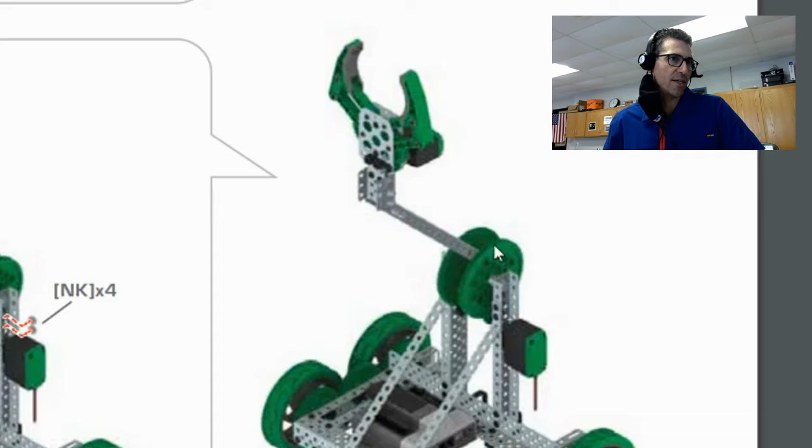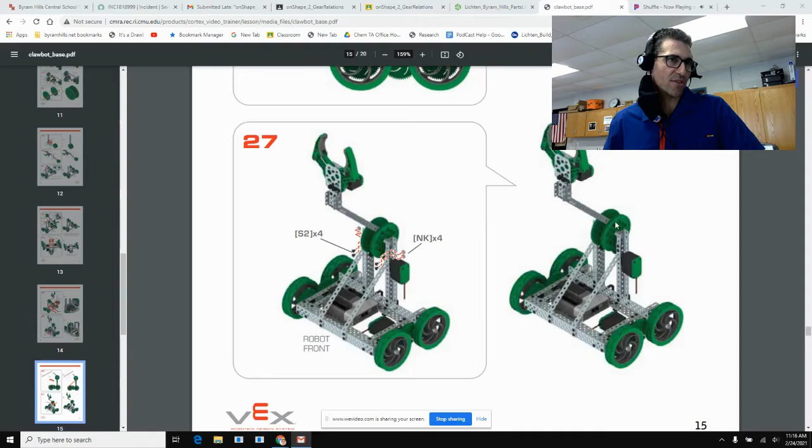This is the image from an instruction booklet of where we're trying to go next. As you can see, there's an arm with a claw on the end of it, and that's attached to a gear. And underneath this big gear, there's a smaller gear that's on a shaft that goes to the motor.

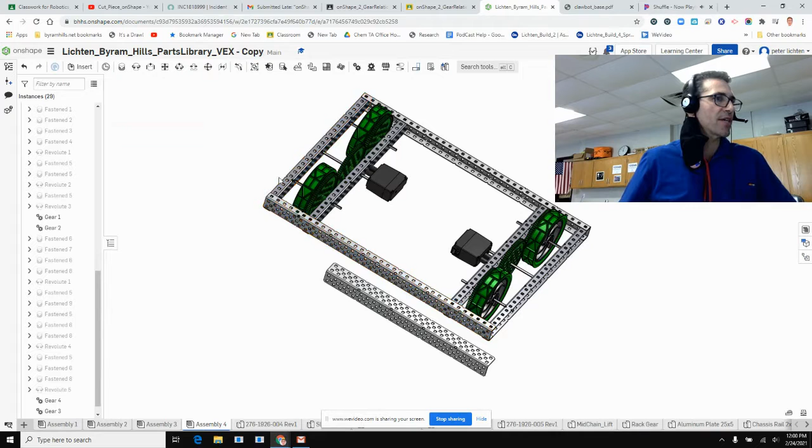Okay, I hit insert and then type metal, and I'm going to go into the metal folder here, and scroll down. I'm looking for what's called an angle brace—it's actually not called that in here, they just use an L to describe it—but this 2 by 2 by 25, either steel or aluminum is fine. I'll take the aluminum one and say green check. This piece is what I'm going to attach a pair of posts to, and the posts will then be used to build the rest of the armature.

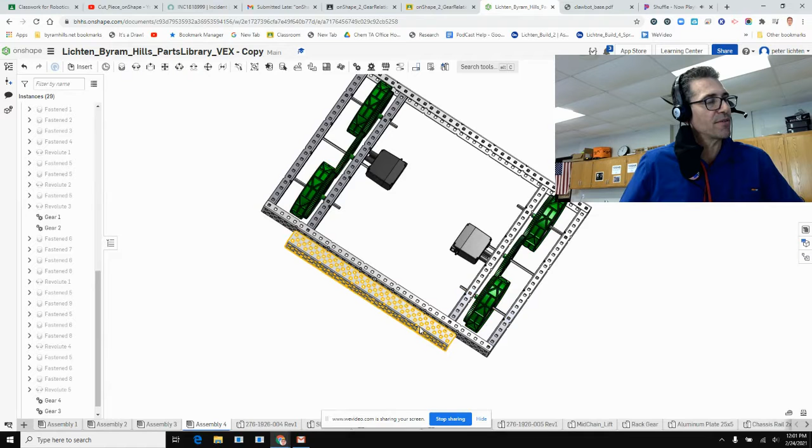So the problem with this piece is it's 25 holes long, and it's a little too big. When I put it in place, it's going to be banging into the gears. So what I'm going to do is offset—it's kind of annoying—I'm going to offset my gears and wheels to be closer to the edges, and that's going to give me enough room to put this in place. I'll be right back.

Now I'll have enough room behind me here to put the posts, and I'm going to say green check on that. I also noticed that my wheels and gears are not going to be hitting that.

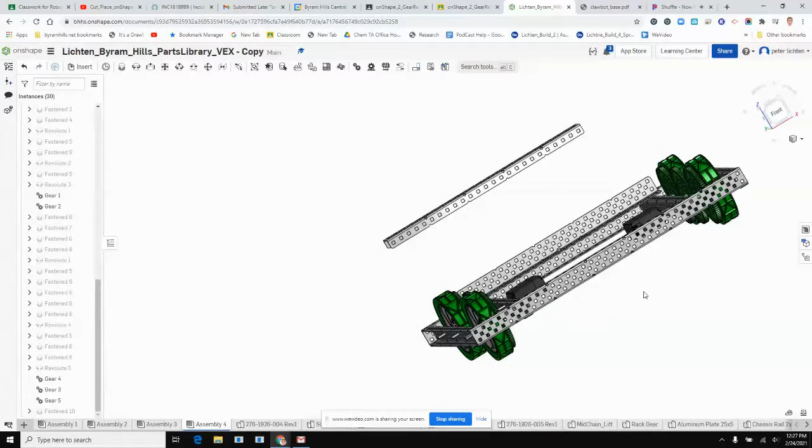Okay, so I've got a 1 by 2 by 25. I'm going to delete this—I don't think I'm going to use that. I'm going to come in on the side of it and hit a fasten mate at around the 5th hole, and then position that somewhere back here. Maybe it's right about there. Let's see how that came out.

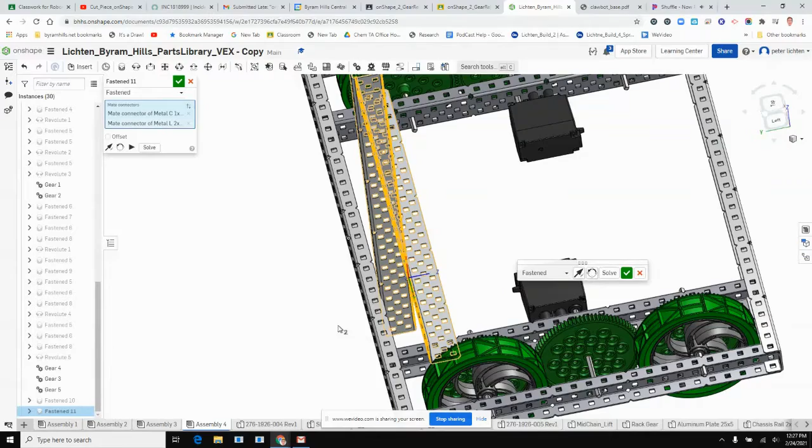Lots of problems, but let's see—we can reorient it again and again. And that's the way I want it to stick up. That's good, so it's sticking up. Is it hitting the bottom? I think I have some clearance between the bottom of the wheel and that. Yes, I do.

I like this because I can attach it on both ends. I can run a screw through the back into it, and I could also run screws from this angle brace into it to help give it some stability. I like where that is. I'm going to say green check.

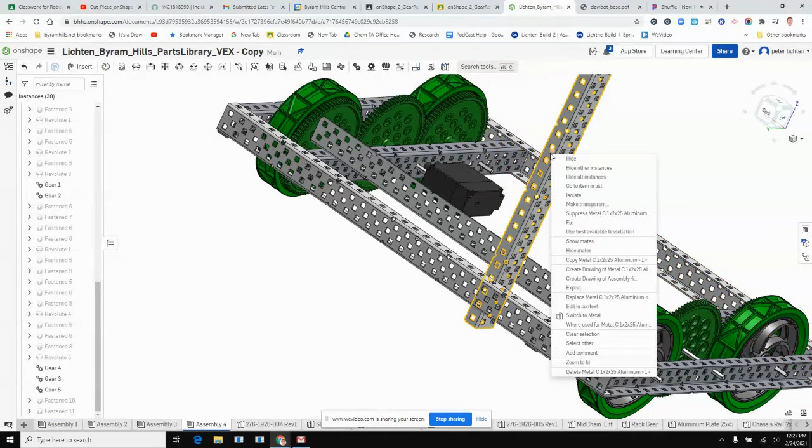Now I'm going to make a copy of this one and paste it next to me here. We're going to do the same thing—fasten mate about the 5th hole up. And then here's where I don't want it to be too far apart, but I'm just trying to guesstimate. Something like this probably will get me done.

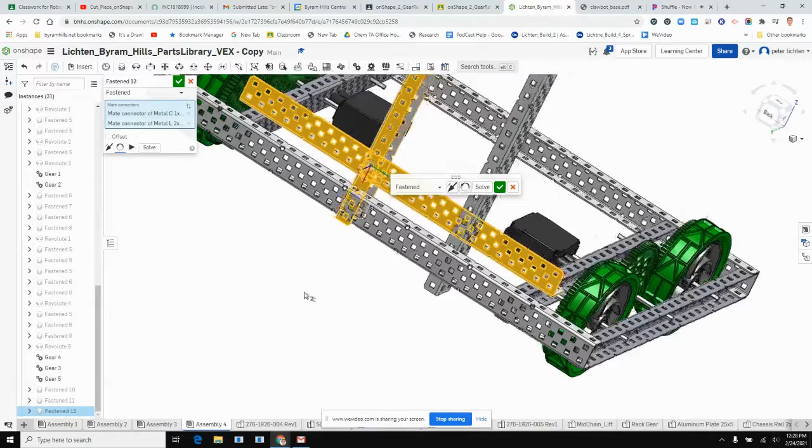And I'm going to have to rotate that twice. It also looks like I'm going to have to flip the primary axis on that one. Everything looks lined up, and I'm happy with it.

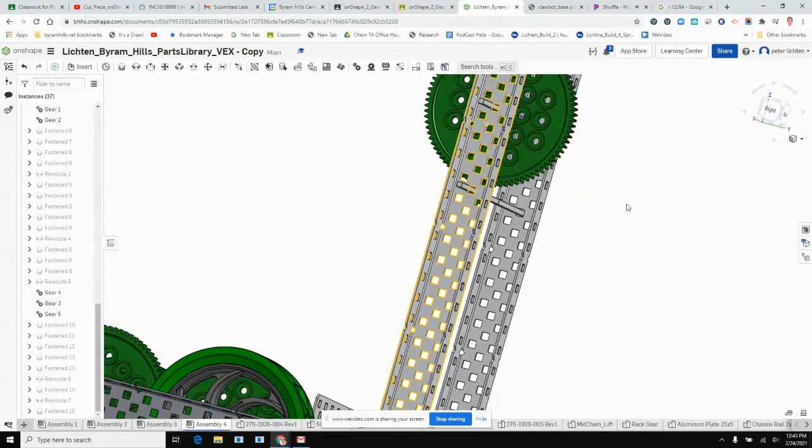Green check. So I took a 3-inch axle, that's this, and I copied it, then fastened it to itself to make a 6-inch axle. And I've placed them 1, 2, 3 basically holes apart, and I have an 84 tooth gear on the top axle and a 12 tooth gear on the bottom.

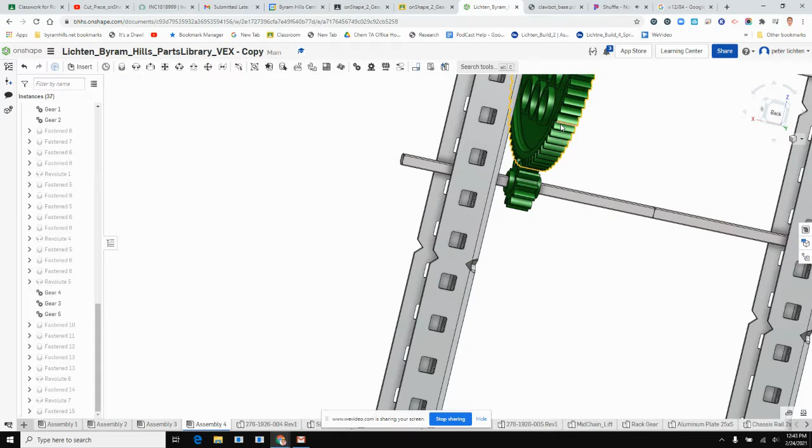And 12 divided by 84 is 0.14, call it 3. So for every one complete rotation of this gear, for every one complete spin, this one will only spin 1/7 of that—of its spin, I should say. So basically like 14% of a spin. Obviously this one's going to be spinning much slower than this one's going to be spinning.

This is how we increase our torque, or our rotational force. And we need more rotational force when we're picking up something like an arm that's going to have something at the end of it, like a ball or something like that. We're going to need that extra torque force to lift it up.

When you put those 6-inch axle shafts in place, you're doing that with revolute mates because they need to be able to spin. The next thing I'm going to do is put a gear relation in between the two mates I just did. The mates were Revolute 7, which is the one on the bottom, and Revolute 6, which is the one above it. My relation ratio is going to be 12 teeth by 84 teeth. And I hit the green check.

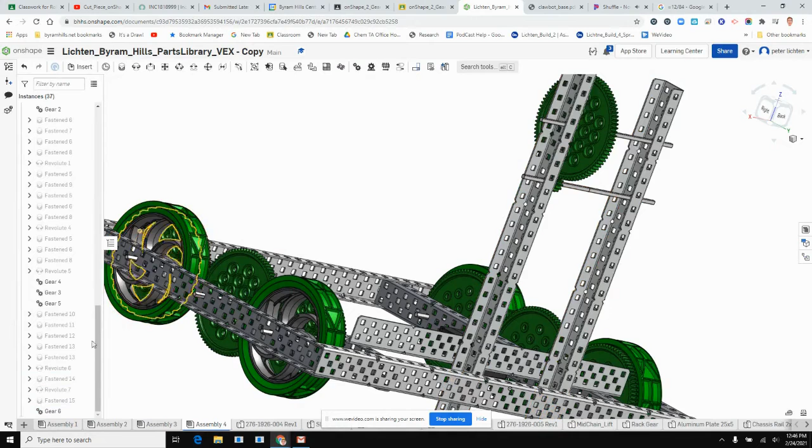Now if we test it by animating, say, Revolute 7, let's test and see if we're working. That's better. So we just always have to remember that anytime you have two gears interacting, one should always be spinning clockwise and one should always be spinning counterclockwise. All right, that's looking much better.

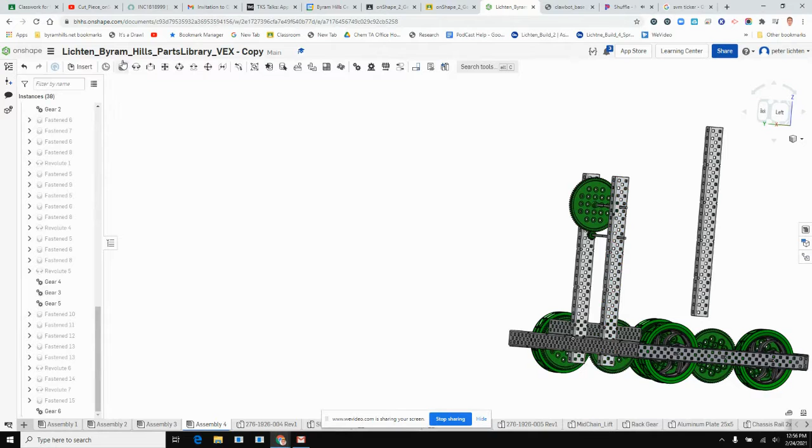Okay, we're ready to put the arm in place so we further know where to put things. I made a copy of one of these C channels, and now I'm going to fasten the C channel here to the shaft. In reality, it would be really fastened to the gear, but just to make sure I get it in the right place, I'm going to do that. And I think I want to flip it like so. Actually, I like it better the other way, flip it back like this.

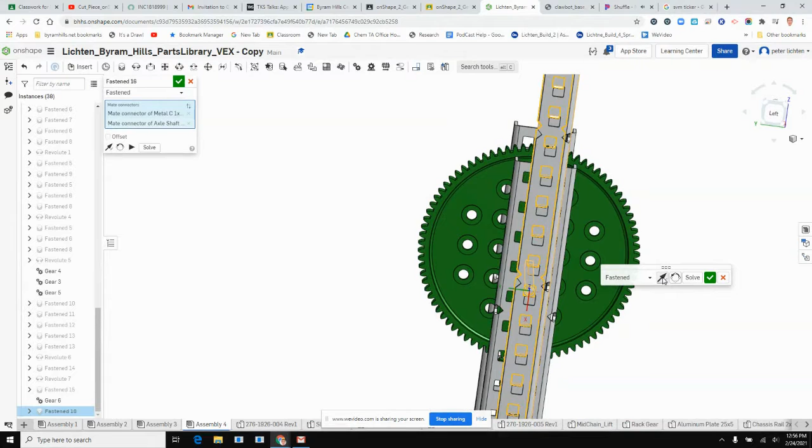And then we're going to reorient it a little bit. Let's have it stick out like that so we get a better sense of what's going on. And then we're going to offset it so that it is flush up against the gear.

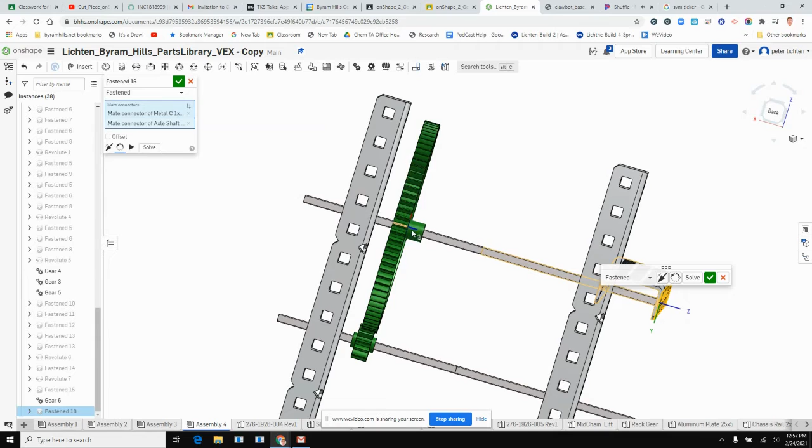Now I notice another issue I have right away. This gear with the little nub sticking out, that's going to get in my way here a little bit. I'm going to need to flip this gear around. Darn it. And now we can go back to this other fasten 18 and bump it over. So we're going to offset it until it is up against that gear, which is probably like -3 inches. But we'll be running screws through the gear into that, so good enough. Let's call that a day there.

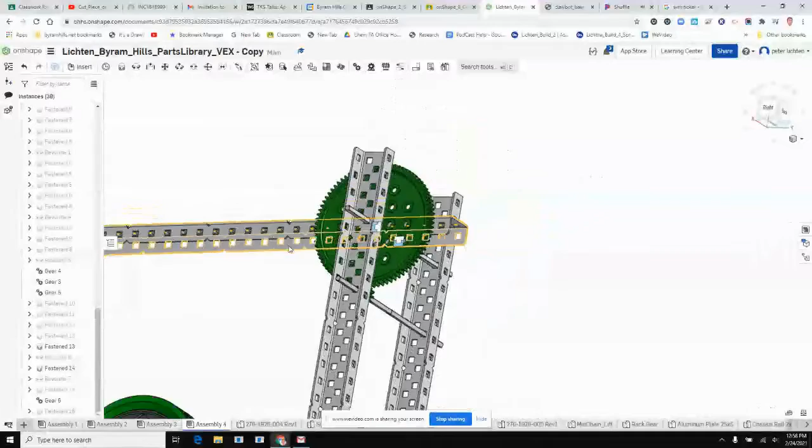Now if this gear were to rotate, you can see that that piece is going to move along with it, and that's what we're looking for. That's our arm. Let's take a look at what it looks like from this angle. So as this comes down, we have an arm. Now it's not long enough, you see, but we can extend that with another piece of C channel, which we will do. But right now we're looking pretty good.

What we want to do next, and I'm not going to do all this, I'm just going to tell you: you want to put another one of these gears on this side and another small gear underneath it. I'll be back.

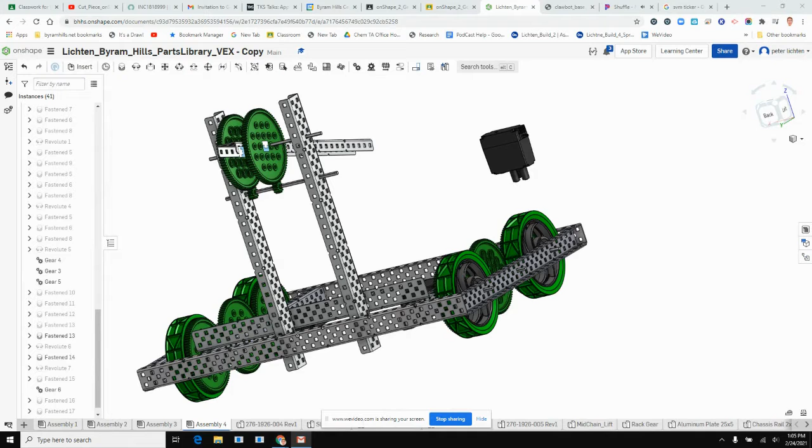All right, so I put the other gears on, and that's the setup. And now we're going to add the motor. So I've got the motor in place. I'm just going to fasten the motor to the post over here, but make sure that the place where the motor shaft goes is going to line up with that shaft.

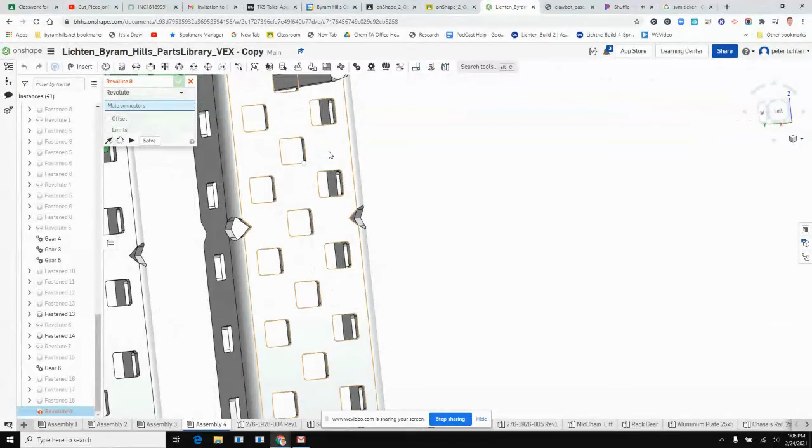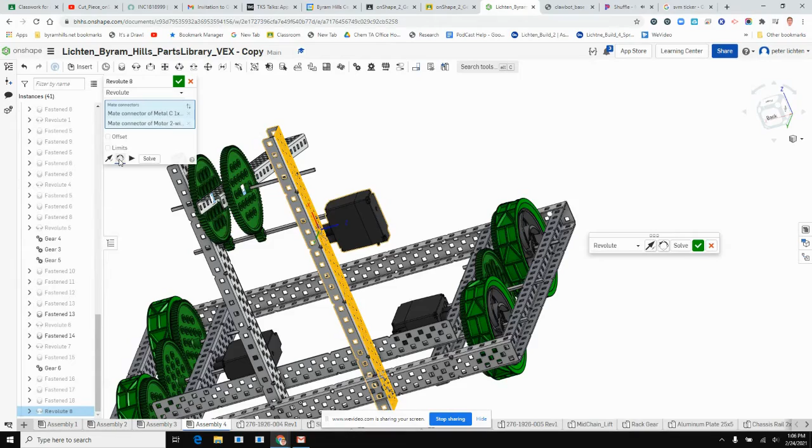So we're going to pick a revolute mate here. I'll just pick the hole right below. I don't think I picked anything there, let's try that again. There it is. And then we're going to pick the spot on the motor right next to the place where you put that. Let's see, we're all on the wrong side, so flip the primary and we're going to orient it. And that looks great, that's how we want it to be.

We're already done, check. And at this point, this is the basic build for your arm. If we revolute, say 8, or animate - sorry, here we go - and that's what your arm is going to look like.

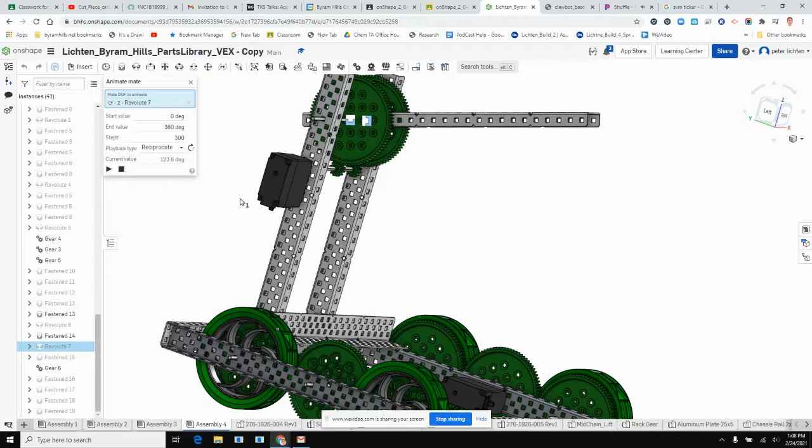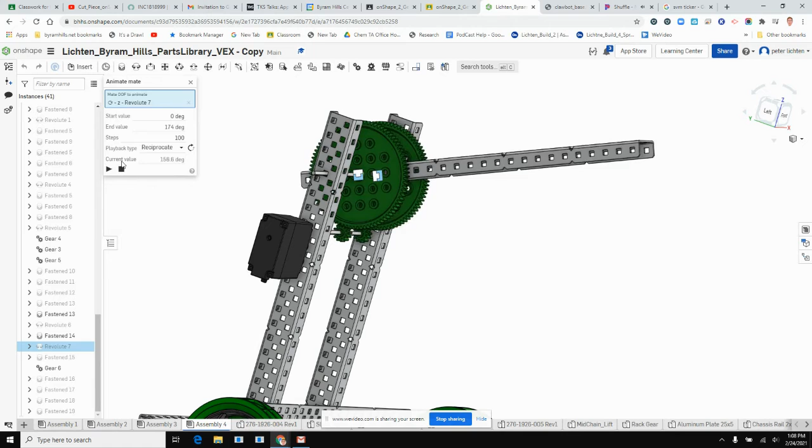Let's stop it for a minute. Let's also start experimenting around. So 174 degrees might be, say, the end value I want to get to, 174. And I do want it to reciprocate, but if I want to make the animation go much faster, I'll change the steps to 100. Now I play it, and I can see it go up to 174, and then it should come back down. So you can see how my assembly is going to work.

All right, congratulations if you got that done. It's pretty tricky.